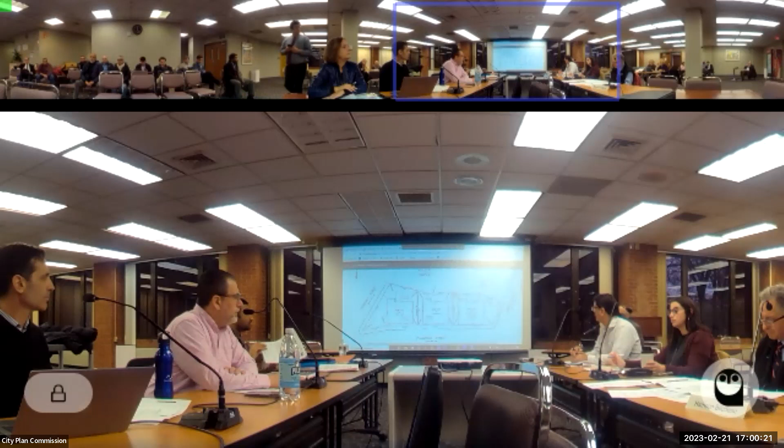Okay, thank you. Commissioners, do you have any questions for the applicant before we hear the staff report? Okay. Shoyan, take it away. Thank you.

Commissioners, this lot is located in the C2 zone. The C2 zone intends for neighborhood commercial mixed-use development, and it corresponds with that portion of the future land use map which intends for those kinds of uses. So the subdivision would result in lots that would accommodate the uses intended by the comprehensive plan. As you know, the C2 zone does not have minimum dimensional requirements or impervious coverage limits, so each lot will comply with the requirements of the ordinance.

We don't foresee a negative environmental impact. These will be buildable lots with no development constraints, and vehicular and pedestrian access will be provided from Plainfield Street. Based on that, we recommend that you vote to approve the preliminary plan, finding it in conformance with the ordinance and comprehensive plan, subject to conditions: that the validity of the preliminary plan be extended to 1 year from the date of recording of the approval letter, and that final plan approval be delegated to DPD staff. Thank you, Choyan. Anything else from the commission before we open this up to public comment?

Okay, with that we will open this up. This is a public hearing, so if you are here to comment on this agenda item, number 1, case number 23-008 MI, 665 Plainfield Street, if you're joining us virtually, please raise your virtual hand, or press star 9 if calling in. This is a hybrid meeting, and I don't see anyone in the room interested in speaking. Do we have anyone in the virtual world, Bob? We don't. Okay, so with that we will close the public comment portion of this agenda item.

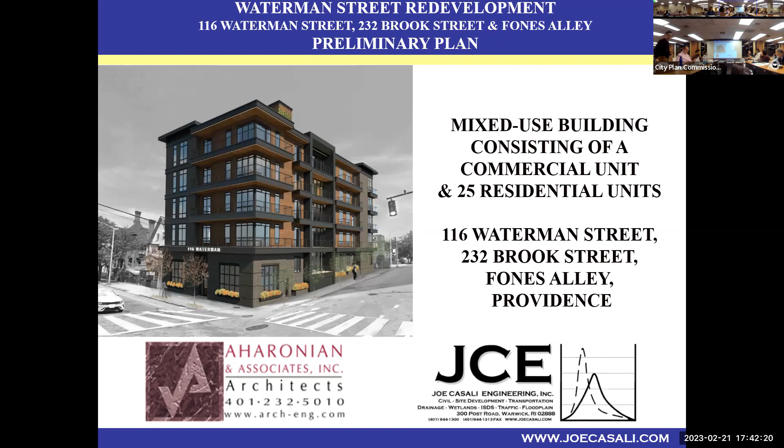As a result of the discussions at the last meeting, we have revised our plan to provide additional non-residential space on Brook Street, so that the Brook Street elevation now contains 65% non-residential space, whereas before under the older plan it provided 23%. So Oscar, the architect, is here to show that and describe what we've done and how we've made the change.

Before we go to that, it's important to me that we comply with the regulations. We sought a waiver from the requirement on Brook Street because the interpretation in the past has been that a waiver was required. But if you read the regulation carefully, and I'm not backing away from the change we're making, I would suggest to you that a waiver is not required here.

Let me read it very carefully, in the first few words of this regulation on the ground floor ordinances. It says, for a building that fronts on a main street, in a C1 or C2 district, residential and parking uses are prohibited on the ground floor of the building within 20 feet of the main street. So when it says fronts, this building fronts on Waterman Street. We have full commercial uses on Waterman Street when the reference is the main street.

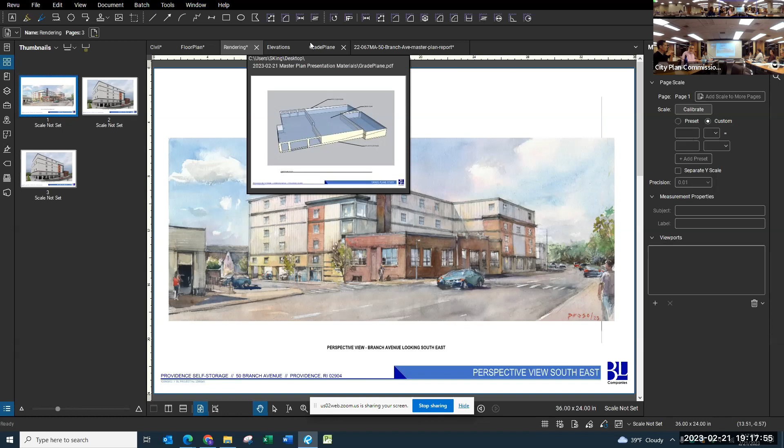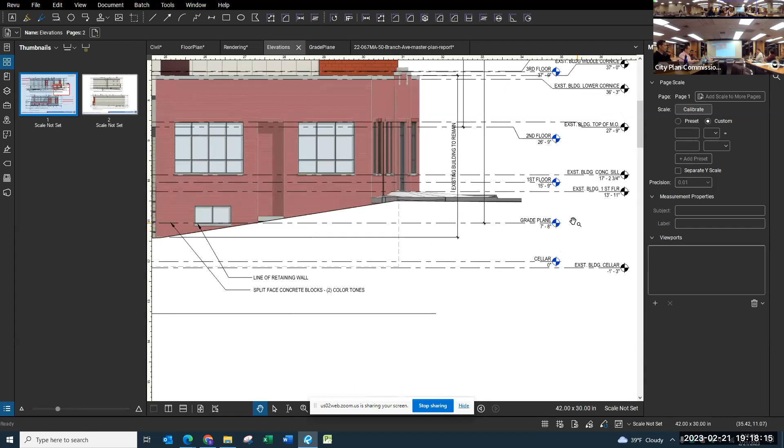Yeah, it's height. So the way we measure it is height from average grade. What we ask applicants to do is take spot grades at the corners of the property, average those, and create a grade plane. The height of the building is measured from that grade. I do believe that they've done that.

Maybe you could go into a little bit more detail about how that was calculated. And if you're going to do that already, don't take it out of order, we can come back to that. But it was just something before you got too far along I wanted to bring up.

Thank you, Mr. Chairman. I was just going to provide the introduction, but we'll make sure that once we get to the experts, they'll go right to that one item first.

Additionally, we also have a parking waiver that we're asking for as part of the project. I think this board has seen self-storage before. We also did provide a parking analysis, but we don't actually need, as part of our business, as many spots as the code would require, because the use is very specialized and people don't come there as often as you may think for a regular business.

The business itself will be gated off, so only employees can have access to it. They'll have regular business hours, 9 to 6, 9 to 5. The actual self-storage facility will be open 6 a.m. to 10 p.m., but you need access to be able to get in. So you would have to have a code, and the gate would then open with the code to get in.

You need that same code to get out, so it doesn't just open if you're inside. There's a camera that takes pictures of the license plates going in and going out to ensure that people are going in and out correctly, and there's cameras throughout the entire facility that monitor that and ensure that nobody's staying in units, using them overnight, or improperly being there.

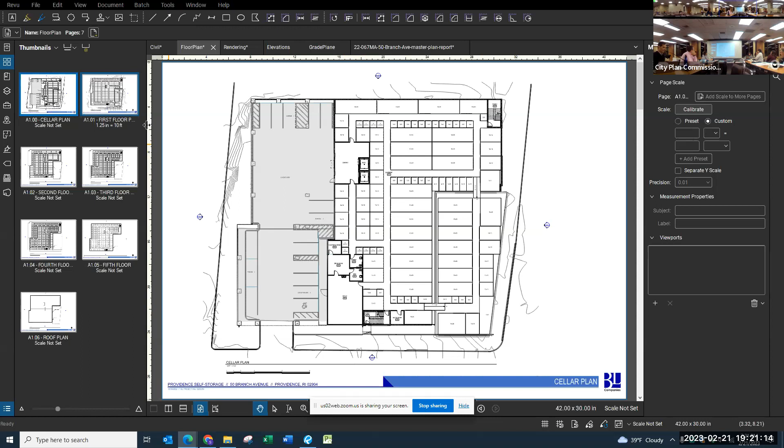I'll just give you a quick overview of the floor plans and then I can go right into the height and that calculation. So the building is set with 5 stories and a cellar. That lowest level is where we have the parking under the building, small office space, loading area, and then units. Following up on the other floors, they're all laid out with units ranging from 200 to 300 in quantity, depending on the size. Including the existing building, we are looking to put storage units within that and make use of the building. I'm going to go to the elevations.

As part of that, I said it's a cellar. We did set the average grade plane by taking points around all sides of the building. So 2 sides are pretty much buried, and then it's more on that parking side. As it slopes, our cellar elevation was 30 and our average grade plane is 38. So it does also put us with more than 50% of the building below grade to be able to call it a cellar.

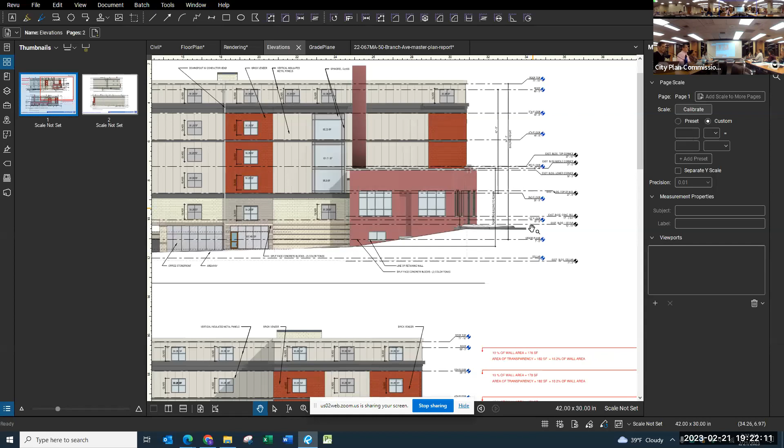And that 38 of our average grade plane, if we would take that, it's 65 feet to the top. So we had done the 73 as a worst case as we were finalizing the average grade plane in relationship to keeping that existing building. Because that's the actual based on your points of measurement, not eliminating the cellar. Correct. That makes sense.

The other thing that we did take into account for the staff comments is the transparency as a requirement of this district. So we did add additional glazing on the upper stories. We have 50% transparency on the first level and greater than 10% on all the stories above.

Suze King, also with BL.

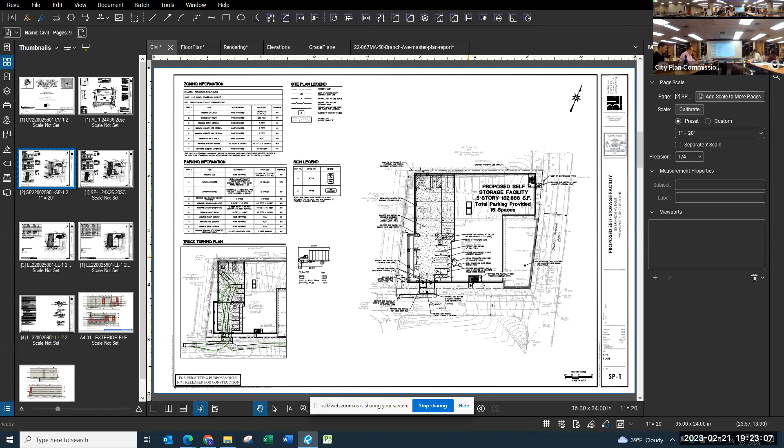As civil engineer for the site side of things, at a high level, when we met with the city, we were talking about the layout of the parking, and they had requested that we put in 2 loading areas. So we took what we originally had preliminary - obviously full design will come with the preliminary plan - but we added 2 loading stalls here. We revised going from parallel parking to perpendicular parking on this side in order to keep the parking count at 16.

In the parking memo we provided, there are studies done at a couple other sites that have actual data of people coming in. This really is a facility where people go in for 15 or 20 minutes and then leave. It's not that everybody shows up on Saturday and there's a line out the door - it does self-regulate. So having 16 parking stalls is what we found to be a good number for a facility of this size.

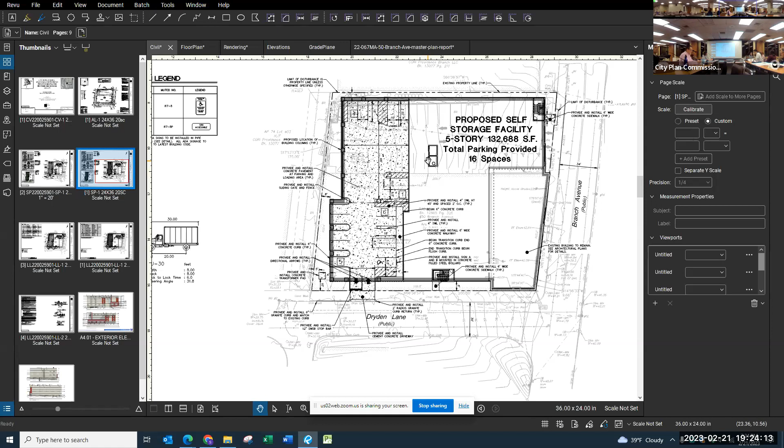The other site comment that came up during the preliminary conversations with the city is tree canopy as far as the site goes. Right now there's a little bit of green space in the back here, but it's very, very tight and doesn't have much room for growth. So what we discussed is making use of the street trees.

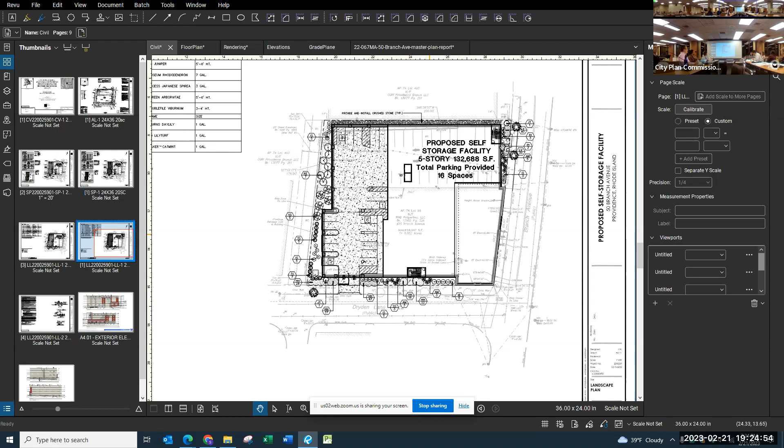What we were looking at is there's three existing trees - I believe they're red oak, not being the landscape person, sorry - so we would match that and add a 4th one, giving us 4 large trees on one side. Then in front of the existing building here, it's a typical sidewalk with not a whole lot of room. But as our building sets back a little bit, there's some room on this end where we can incorporate a couple of medium-sized trees.

That way we'd be hitting the canopy requirement, balancing it on either side of the door. We thought with the landscaping there, it would look purposeful rather than just 'all right, you need trees, here's a couple of trees.' So looking to have a little bit of greenery in that area is what we were looking for there.

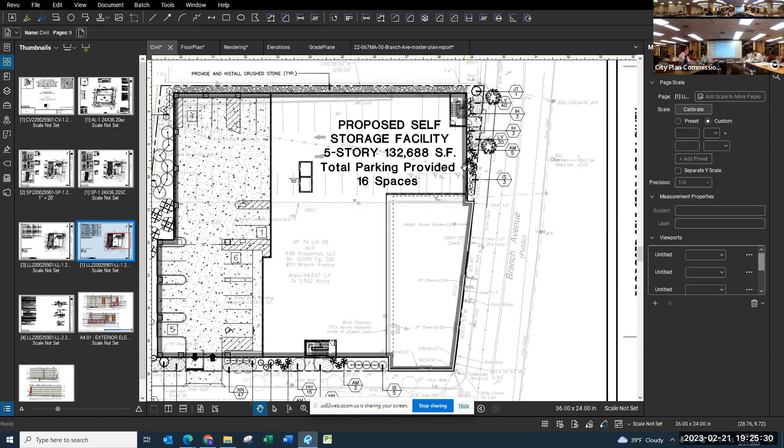Then on Dryden Lane here, we'd be being consistent with what's already along the roadway. In the green space area, we still have additional landscaping there to beautify the area, but the tree canopies would be along the public right of way.

With the building at the - that I don't know.

Mr. Chair, I was just asking to discuss the reasoning for the design waiver from the corner side yard setback requirement. We don't have those exact numbers with us tonight, but we can provide that at the preliminary stage if the board wanted it. But I know what we provided in the application is accurate from the review.

With that being said, Mr. Chairman, I think that concludes our presentation. If the board has any questions, we will certainly answer them.

One of the recommendations, if we were to put forward a motion to approve this master plan, was discussing the detailed landscaping plan - that you'd need to present that at the preliminary plan stage, the next stage of approval. Would you be able to get that wrapped up and meet with the city forester to make sure the city forester buys in, maybe before preliminary plan?

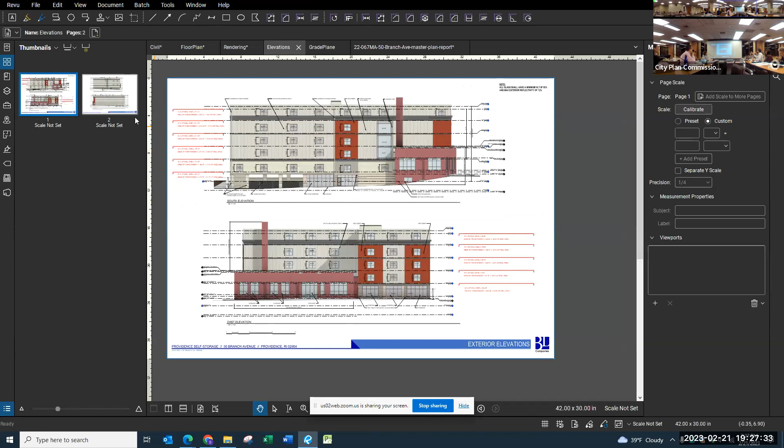I'm just going to comment that the north elevation rises above the restaurant next to it, and that north elevation doesn't have any glazing. What is on the bottom that looks at that? Where's that facing?

So this is back-to-back buildings on this side, and there's nothing looking onto that. The easiest way to explain it - you're right alongside this building here, where Benny's used to be. So you'd be looking at it 2 or 3 stories high from that side, going up behind that building. You could potentially see some of that facade above as you're coming from the cemetery or from the parking lot.

I don't know if you'd quite be able to see it with the angle, but it would be back with that building right there. I'm just wondering if the height, you'll see the top of the building, but it's still blank. There's no glazing on there.

On the last floor, and the other one you'll see from the highway, but the west elevation. If you'd like to see some, we can certainly provide that at the next stage. We can put that on that north elevation. I think it might help visually, but I know it's not a requirement.

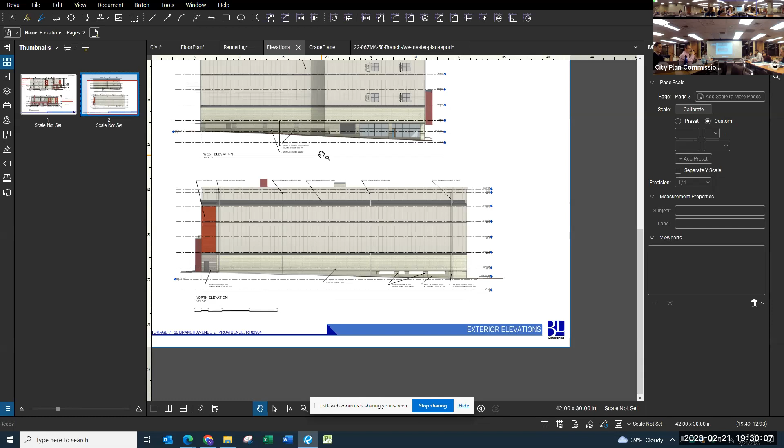Other commissioners' comments? Well, I just wondered, I think the parking, am I correct, there are 1,399 units, is that correct? Yes. And you have only 16 parking spaces.

So if those 16 people all went there and stayed for half an hour, I can't believe that you're not gonna begin to have parking, especially on a Saturday. Do you have any extra parking available in the area, or? Well, maybe you can speak to the rationale as to how you came up with this as being sufficient, to justify for these.

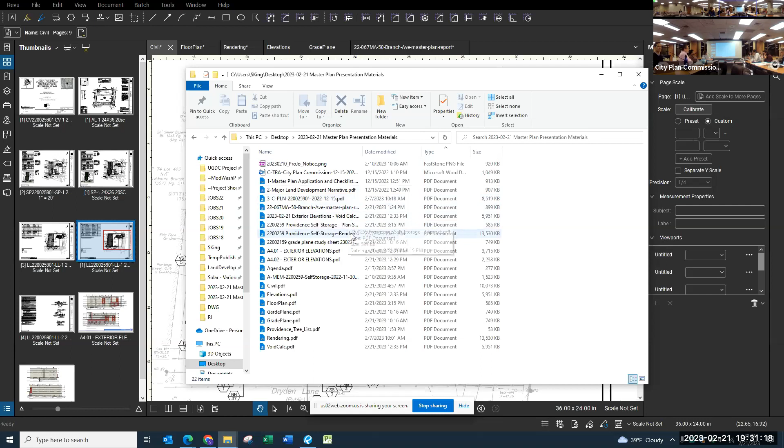So they provided a parking analysis with the application, but this is a large company that owns a lot of self-storage facilities. Obviously they have a business interest to provide enough parking, and through their own experience and calculations, they find that at no given time during any peak time did they need more than 16 spaces. Now, I can't speak to exceptional circumstances that can happen, I can't predict the future, but just by calculations and from what they need at a peak time, they don't need more than the 16 at any given moment.

So the ordinance requires 28. So we're asking for that to be reduced by 12, because of the nature of our business.

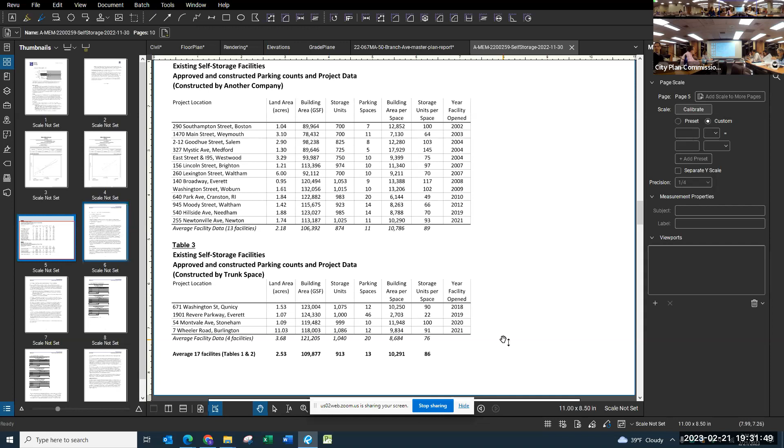And I know that 1,400 units is a lot, but when you have a self-storage facility and you bring an item there, oftentimes people don't go back to it for a month or 2 or 3, 4, 5, 6 more. Everybody's a little different, but for the average stay and the time that they leave, we don't find that 16 would be insufficient—we think it would be a little in excess, actually. So we do feel confident in providing that number.

And again, you reduced it because you expanded into a loading zone, correct? Which you initially had. Yeah, 2 loading zones, the parking spaces that we provided as well, because we were over 100,000 square feet of building space.

Sorry, one clarification. So from what we previously submitted, there were 16 parking stalls. We still have 16 parking stalls. So adding the 2 loading zones, we had parallel stalls over here that we're going to change to be perpendicular stalls in order to make up for those loading stalls. So we still have those 16. Granted. All right, thank you.

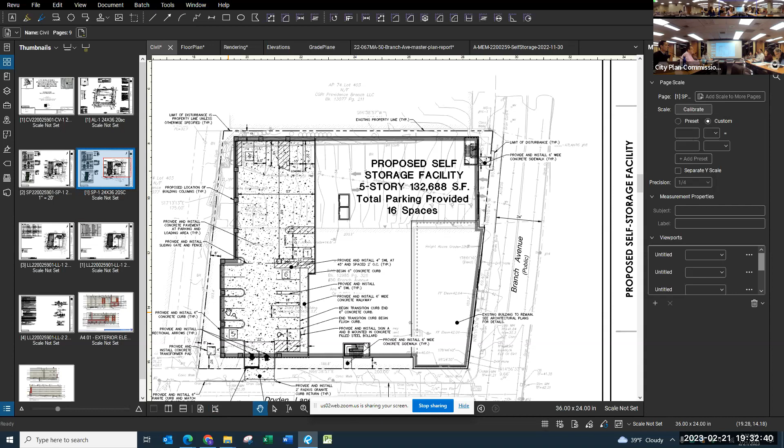Do we have anything else for the applicant? We can always come back after staff report if we have any other additional questions.

No, we're just looking at a self-storage facility across the street, across the highway, and there's Corliss—blank wall from the highway on 2 sides. But I think the recommendation is, what will you see from the master plan—you know, vetting the layout, the density, everything like that. Then we come back and get into how the sausage is made with the preliminary plan.

All right, with that, I think that's an appropriate time to hear the staff report. It could be Sharice, who's to say? All right, let's hear the staff report and then we'll go to public comment.

Thanks, Mr. Chair. This project does conform to the design requirements of the C3 zone. They are located within the build-to zone at the front lot line and have incorporated a portion of the former building into the space. The materials used include brick veneer, concrete block, metal paneling, and glass, which are permitted by right in the C3 zone.

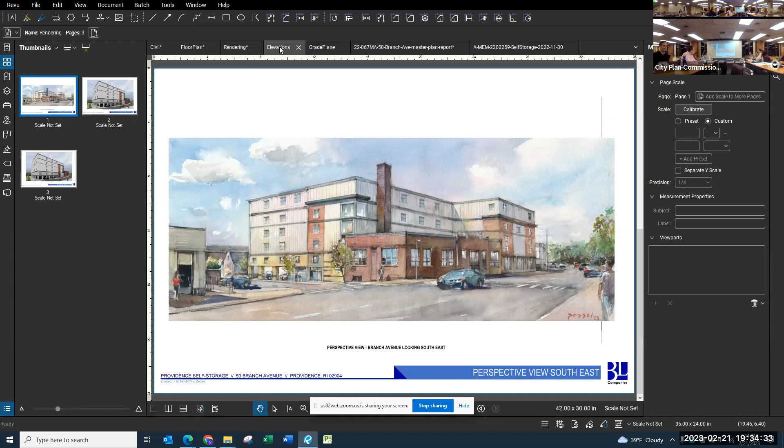We also noted that while the applicant does have some transparency on the upper stories, they are required to provide 10%. So we asked that they look at opportunities to add more and make it more symmetrical. Based on that, we find it would conform to the design requirements of that zone.

They did talk about landscaping, and they can work to meet that requirement under the supervision of the city forester. They can also make plantings off-site if they cannot meet that on the site.

As far as parking goes, they spoke to their need for a dimensional adjustment for parking, providing 16 spaces where 28 are required. Based on the parking analysis they provided, as well as the fact that they are providing internal parking, we find it appropriate to recommend that you grant this parking adjustment.

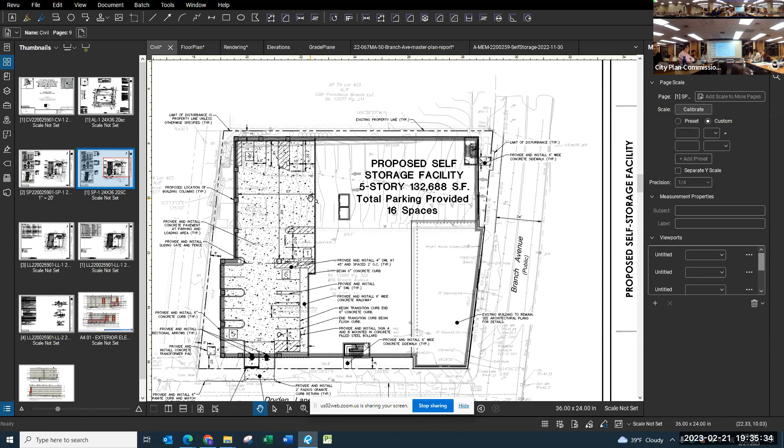As noted, they will be providing 2 loading spaces, given that the capacity of the building will exceed 100,000 square feet. They are also requesting a dimensional adjustment for height. We find it appropriate to grant that, given the unique conditions of the property, the gradient it's located on, that they're preserving the building, and the fact that they are eligible given they are providing internal parking.

They also asked for a design waiver on Dryden Lane from the corner side build-to percentage requirement, and we would recommend that you grant that, finding they will be providing landscaping within that area. They will be required to comply with any environmental regulations at the preliminary plan stage.

Based on that, we find this to be consistent with the comprehensive plan, given that the future land use map intends for general commercial mixed-use development, which can be seen here. They will also conform to objective BE2, which encourages new development to complement traditional character, and they're doing that by preserving the building, which is also in conformance with objective BE5. So this use is permitted by right.

Based on you granting the dimensional adjustments and design waiver, they will conform to the dimensional requirements of this zone. They will conform to parking subject to you granting a dimensional adjustment, and they will meet the landscaping requirement subject to a plan approved by the city forester. We don't foresee a negative environmental impact. This is a buildable lot with no physical constraints, and adequate vehicular and pedestrian access will be provided from Branch Ave and Dryden Lane.

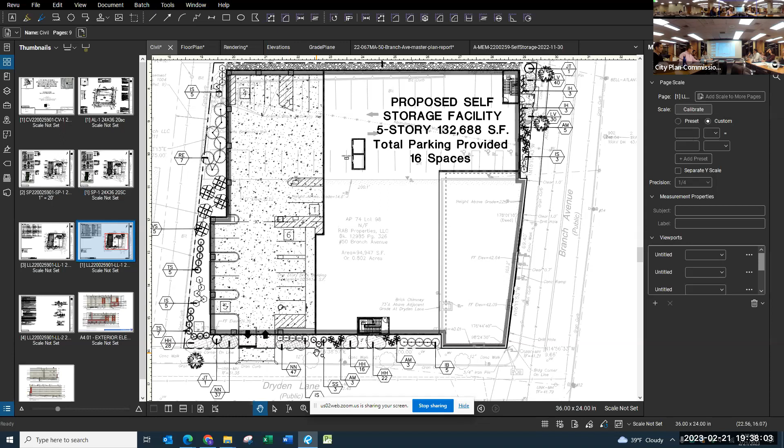That the applicant provide a detailed landscaping plan at the preliminary plan stage. We did ask that the loading spaces be defined on a preliminary plan, but they have shown that on the plan in front of you, so we can strike that. Also, we see that they have included more transparent areas on the upper stories based on its latest elevations. So based on that, you can approve the master plan and have them proceed to the preliminary plan stage.

Although I think item 3 might be something you want to consider with respect to those north and west facades. Right, on the other building. There is transparency on the self-storage unit on Corliss that faces 95 on that top story. It's the top story. A tree or something to hide the big blank wall. It's a large blank wall overall, yes. Or graffiti.

All right, this is a public hearing, so at this point we will open the public comment portion of this agenda item. If you are in our virtual room, please raise your virtual hand or press star 9 if you're calling in. If you're here in person, raise your hand. All right, we're seeing none, on the virtual side either. So with that, the public comment portion of this agenda item is closed.

I'm going to pull a Chris Potter and say, we all remember Chris Potter, right? I've spent an inordinate amount of time at this building. It was the Board of Elections in 2016 when I ran for office, before it moved to Plainfield Pike in Cranston. So I've been there more than I'd like to admit. In the 90s, I'll best you on that. I've been there for 3 recounts on elections, representing candidates when I was at the Attorney General's office. So I'm glad that this is for people who lost. Yeah, exactly, this is for me, right? Not just you, there are other losers.

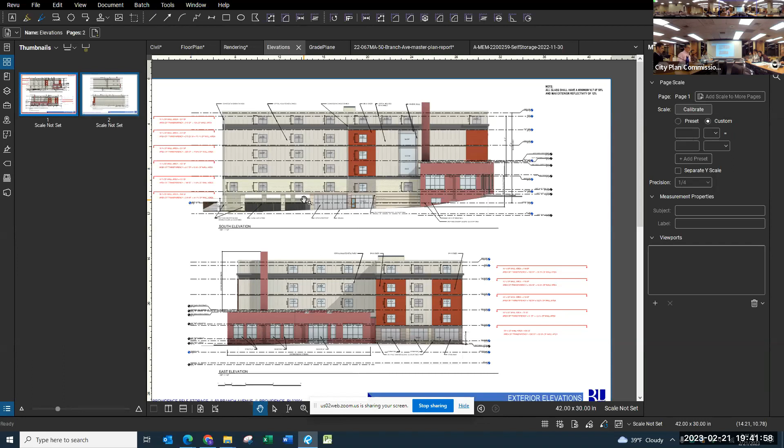All right, let's go ahead. You want me to go? Yeah, okay, we're gonna have a couple different votes here, so it's gonna be dimensional adjustments first. I make a motion that we grant a dimensional adjustment to permit the proposed height of 73 feet and 5 stories, and also to grant a dimensional adjustment for 12 parking spaces where 28 are required, but 16 will be provided, based on everything that we heard today.

Yes, okay, all right, we can couple those. All right, so we have a motion. Do we have a second? Second. All right, let's go around. Noel? Aye. Nicole? Aye. Harry? Aye. And I vote aye.

I will make a motion that we grant the design waiver from the corner side build-to percentage requirement, finding that the applicant will provide an expanded walkway with more opportunities for landscaping, based on everything we heard today. All right, we have a motion, do we have a second? We have a second. So Noel? Aye. Nicole? Aye. Harry? Aye. And I vote aye.

Okay, go ahead, you can still make the motion. Okay, they don't want to be responsible for that. Cole is the motion maker. All right, I will make a motion based on everything we heard today, and everything in the staff report and what was presented.

That we vote to approve the master plan, finding it to be in conformance with the zoning ordinance and comprehensive plan, subject to the following conditions: 1, that the applicant shall provide a detailed landscaping plan at the preliminary plan stage; and 2, that the preliminary plan shall include more transparent areas on the upper stories and include a transparency calculation along with what the chair mentioned in terms of the vicinity of the buildings. Also, just to amend the first one, with city forester feedback at the preliminary plan stage. I will amend my motion.